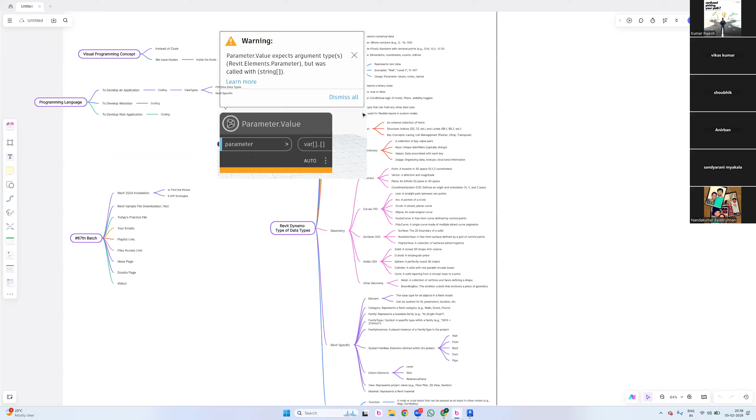Come on. So basically, you've seen the data type sheet. So what to do with the sheet? I didn't understand what to do with these sheets. And particularly when I'm searching nodes in Dynamo, there is one thing I observed: there is a node like Select Model Element. If I miss the dot, it gives me other nodes. So what's the importance of nodes, and how to identify when the dot is needed and when it is not needed? Please explain these two things.

We just finished only one day of training, Shoubhik. So you're asking very advanced stuff. First, one very strict, important note for everyone here. Don't panic. I won't miss even a single topic, because most of you are enrolled for the combo here. For now, about 60% are on the combo. The other 40% can convert by next week. After that, you don't have a chance to convert.

Okay, so most of you, I want to see in level 2 API. In API, we are not going to discuss anything about Dynamo. So to make you ready, I don't want to leave even a single topic out. Is it clear? Every single pinpoint will be explained. So don't panic. My explanations are very, very clear, like opening a banana and putting it in your mouth. Understand? I'm going to cover everything.

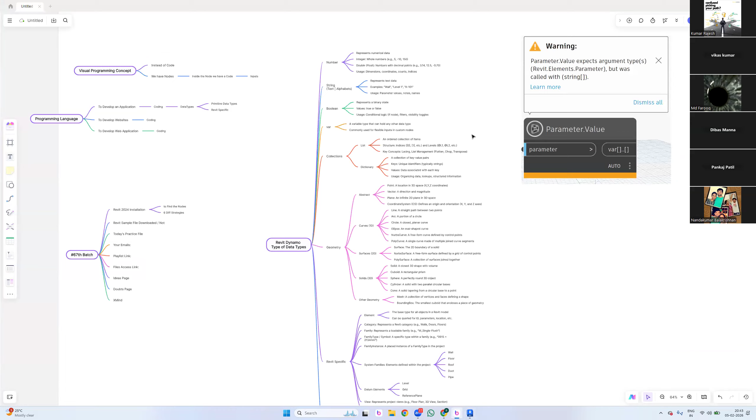Sir, actually, we covered the three data types yesterday, but I want to know, you explained two types of data types, like primitive and application specific. So do those data types come under primitive or Revit specific?

See, it's very simple, bro. Number is universal. In an application, for example in website development coding, do they use Revit terminologies? Do they use Revit terminologies in any website? No. Correct? No, sir. So if it is not a number, if it is not an integer, if it is not a string, if it is not a double, if it is not a Boolean, consider it a Revit specific data type. Very simple. Okay, clear?

So no more questions. Let's step into the topic. Okay, clear? So after today, first week, I don't want to bother you. Enjoy this weekend. Next weekend, we'll see. Okay, clear? So shall I start?

Yes. Okay, good. So we have seen yesterday what the primitive data types are. One is integer, one is double, and one is string. And Boolean we haven't covered. So yesterday I showed you how to extract that info. Now today we are going to set a value to those parameters.

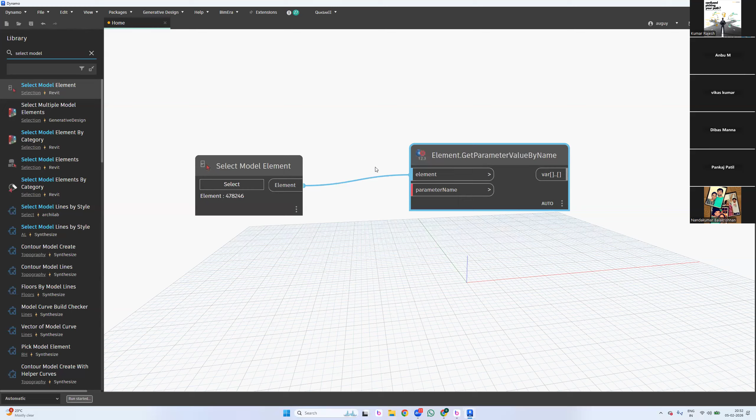Okay, fine. So it is expecting element, I connected an element, and this is expecting parameter name. So if any node is expecting a parameter name, parameter names are always in a string format, correct? So blindly you can place the string without a second thought. If any node is expecting a parameter name, consider it a string. Guys, clear? Clear, sir. Yes, sir. Even though for some set of nodes it is written as parameter name, when I hover the cursor on it, it will not show string there. But still you can consider, if it is showing parameter name, then it's a string.

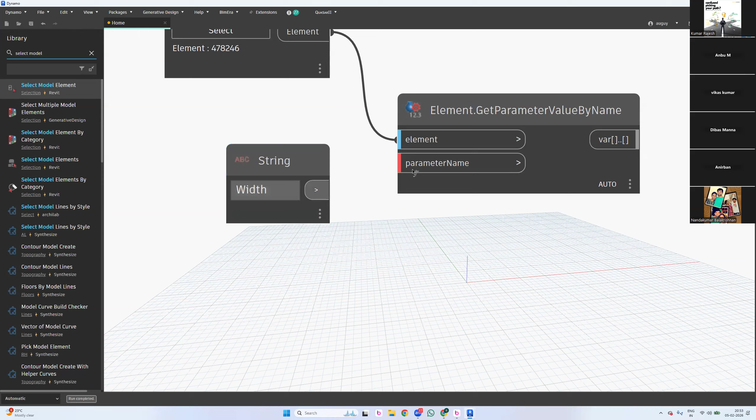Okay, fine. Now I'll ask for width or something, and it's set to 750. Now I want to change this width from 750 to some 900 or 1500, something like that. Now I'm playing with an element, okay. So there I use SetParameterByName. It is again expecting the same element. It is expecting parameter name, and it is expecting the value. So here I have three different inputs.

Okay, now, if I want to use it, I can take multiple connections from one output. This is an output port, correct? And this is an input port. But you cannot connect multiple connections to an input. For example, if I connect this to this, what will happen? The first one will be disconnected. So input accepts only one connection, but from output you can take many. You can take this to this, this to this. You can take multiple connections. There is no limit. Are you clear?

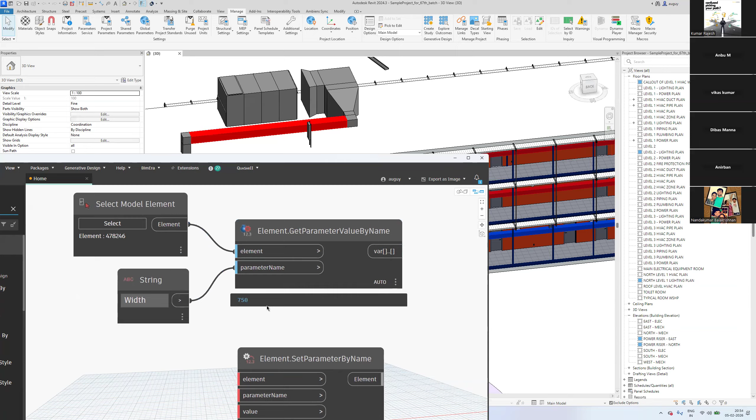So, are you clear with this? Yes, sir. Sir, here it uses this node, Element.SetParameterByName. As per your previous class, I can understand that I have the element and I have the name, right? I have to set a parameter value on that element.

Okay. See, here we are actually getting the value, but here I'm trying to set the value. Since it's already 750 there, I just want to change it to 1200 or something. Now, when I connect this to the same element, to the same width parameter, I want to set a value. And what is this data type? Integer.

The value is different, the data type is different. It looks like an integer, but actually it's a double. Correct? It looks fine, even though it appears to be an integer, it is a double. We can use double because generally we maintain some decimal values too. So I use a number node.

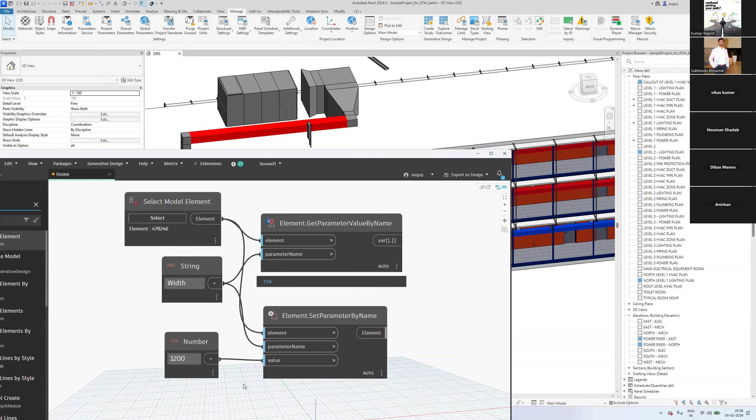If I set it to 1200 and connect this to this, see, the width has changed. Did you notice the width has changed? But sir, why is it still showing 750 there? No, it needs a refresh. Even though you keep playing, this will not refresh.

There is a bug in it. I mean, it's not actually a bug. We don't have a refresh button in Dynamo. Yesterday I told you, so we don't have any refresh button. To get this value refreshed, you have to copy and paste the node again. Now it shows 1500.

Hello. Hi, Rajesh. Hello, come on. Yeah, this is Sukhendu. Actually, I want to ask one thing.

If the duct size is 600 by 600, and if we change the width here, will it automatically duplicate, or will it just change? Let's say we have so many of the same type of duct. Changing the same element, it is not duplicating - you are changing the element directly. The same element is not duplicated. But if we have the same size duct in multiple places, how will it duplicate?

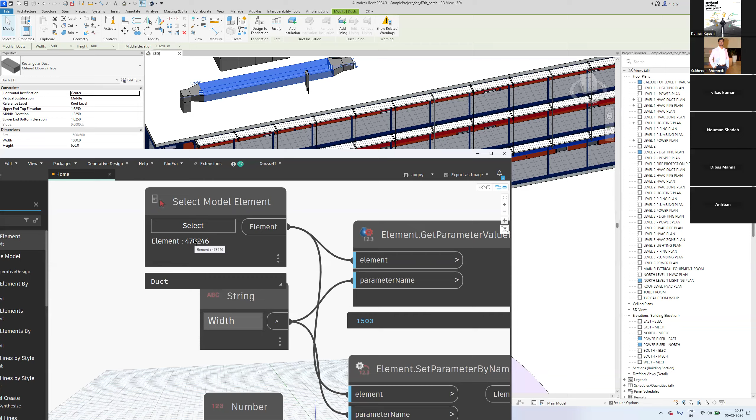No, see, very simple - you are playing with only a single element. Only that element will be changed. Are you clear? That particular element, element 478246 - if you have that given, it will duplicate maybe, right? No, it's the same element. You're changing the width value of that particular element.

Width is actually an instance parameter, so instance parameters obviously affect only that particular element. If it is a type parameter, it will change everywhere. Correct? Yes, if it's a type parameter. Correct? Understand.

Now, element.set parameter by name - I have changed this, I'll just set it back to 750 again. So is it clear? Are you clear? Yes, now clear.

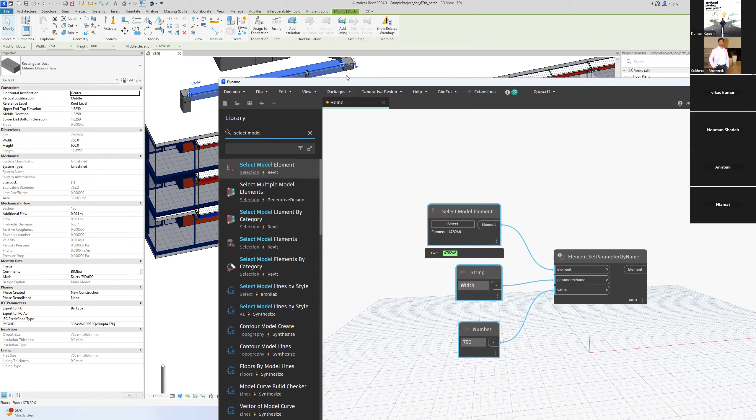So let's play with some other data type again - upper end top. Let me delete this for the time being. Let's see, here you have to understand you will face some struggles while we play with this.

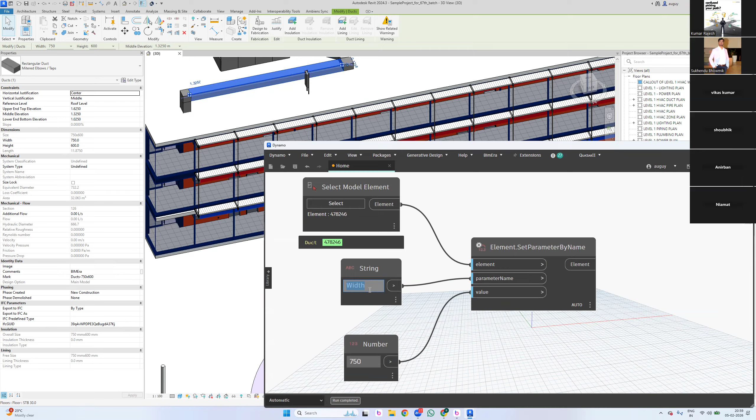Can we change the value if it is something like a report parameter, like there's a length which is 11.8750 which we cannot change now? I'll explain that tomorrow - why, and whether it is possible or not, and in case it is possible, how.

So it's moving. Okay. So now I want to change the height of this. Same thing again - disconnect this.

Capital H, and height is 600. I'll just make it 900. So it's changing. Let's set it back to 600 again.

Hi, Rajesh. Hold on. Sorry.

Hi, Rajesh, hold on. If the values are type parameter, is this applicable, right? Robert, your voice got stuck, Robert. I didn't listen to that clearly.

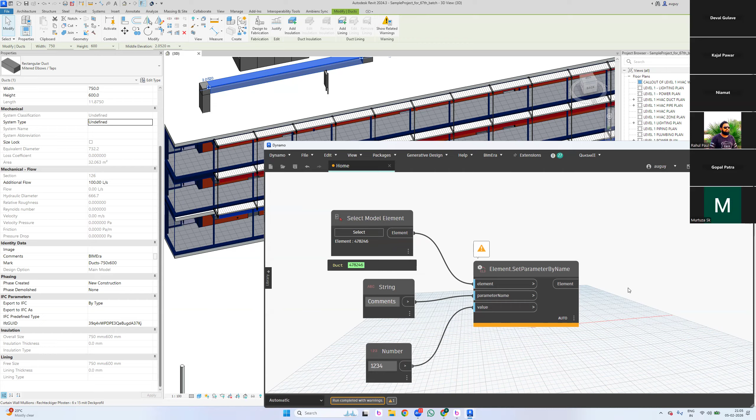So if you just want to read the warning, hover the cursor on it, and it's clearly saying that element.set parameter by name. I mean, if you want me to take a screenshot, I'll explain you. It should be by text. I'll explain you how. You have to use text string.

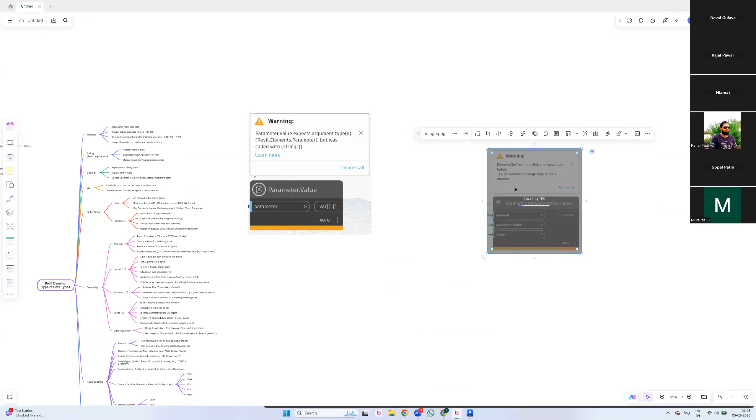See, this is the first warning actually, correct? So this is the second warning we have. Oh, it is loading, okay fine. What it is saying, element.set parameter by name. See why I'm stretching this, there is a reason behind it.

Yesterday also I showed you like parameter value, and I have marked these two things, I rounded those two things. The reason, sometimes the node name is something, but here it shows something else. Okay, so for your sake I'm explaining. Try to understand, whenever you see the warning, just cross check whether these two are exactly the same or not. Okay, you will come to know later.

So, element.set parameter by name, operation failed. Why? Did the parameter die? No. The reason: the parameter storage type is not a number. So it's clearly saying that you have connected a number, but the parameter storage type, the data type, is not a number.

Guys, are you clear? That particular parameter's storage type, in the sense, data type - so you are playing with the wrong data type. 80% of warnings are these two only. Seriously, let's see, in the entire training, do we see any other set of warnings? Nowhere. Data type warnings are the only frequent warnings till the end of this training.

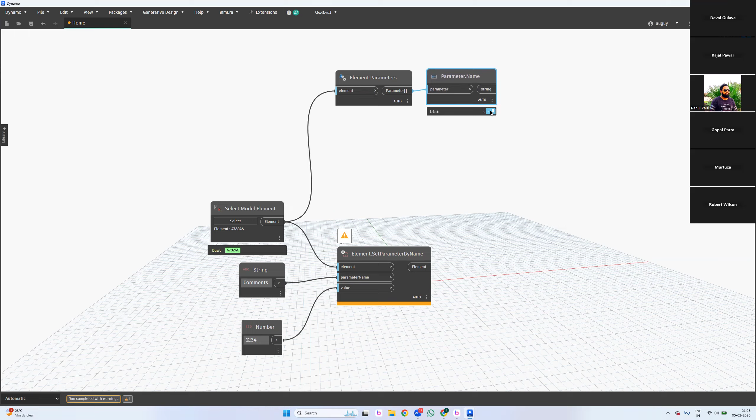See, if dot name is not working without dot. These are actually strategies I'll explain in coming sessions. So parameter dot name, now parameter dot space value.

Same again. Parameter storage type.

I don't need this anymore now. I just have to cross check. I'm trying to play with a parameter called comments. So where is comments? Fourth index value. This one we generally call the index number.

This part is an index number. 0 is an index number, 1 is an index number, 2 is an index number, 3 is an index number.

So actually I have 71 items, but in the end I see only 70. There is no 71, why? Because it starts with 0. Count the 0. All programming languages start with 0 index. Remember this, clear? It's an interview question generally. 0, 1, 2, 3 - for us it's an interview question, I mean when I was learning.

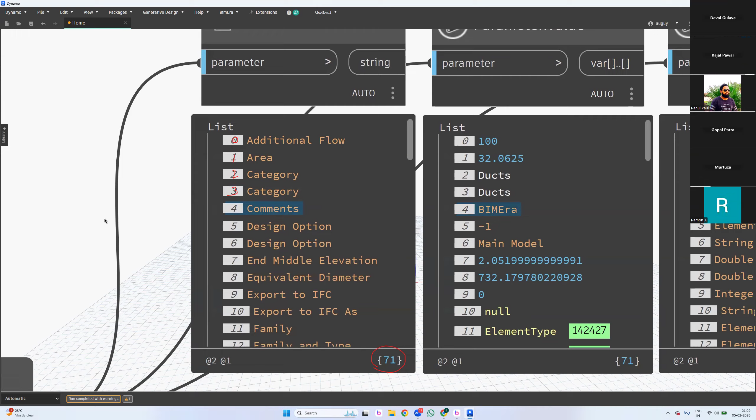So category, now I want to play with the fourth index. If you've seen the fourth index value comments, the entire flow where you use it will not break anywhere. So if the fourth index in a parameter name is comments, that exactly shows the same value. This value belongs to comments only. So this value, see this is string - data type is clearly saying I'm a string.

Are you clear guys? So if you want to set something, you have to play with a string, not with a number. Now I decided, oh this is not a number, that is a string. Are you clear? So if I enter the same 1, 2, 3, 4 and set it, now it will set that 1, 2, 3, 4 to it.

Can we change the justification and reference level, sir?

I'll show you, that is an element ID, I'll come to that in some time. First let's play with the numbers, then we'll come to the strings.

Actually, I have a live scenario in mind - if I want to put a value on comments on each and every equipment which is placed on level 2, then how can I do it?

We have a concept called filtering, bro. So we have a concept called grouping, sorting, filtering. There we are going to apply all these strategies - filtering by level, filtering by room, filtering by type, all these things based on the class, system, type. We'll discuss that.

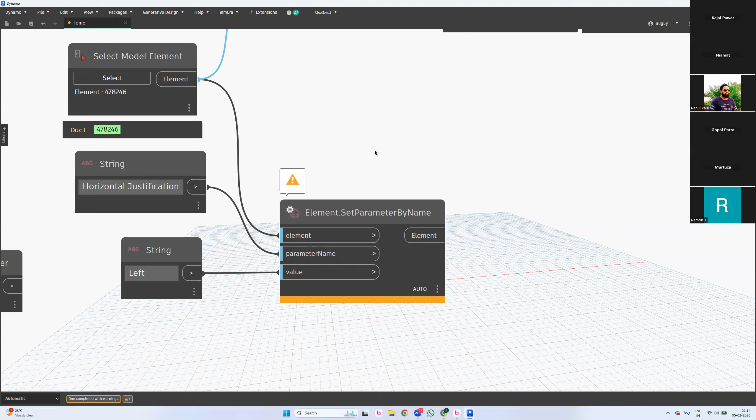Why isn't it working? It is expecting something. Let's see what it is expecting actually. When I hold the cursor on this, no, it's not giving any hint. It's saying that I'm not a string. The parameter you're trying to play with, the storage type of that particular parameter is not a string.

Are you clear? Guys, you have to be more friendly with the warnings. If you hate warnings, you will never become a developer. I assure, I sign on it. If you start, you have to fall in love with the warnings. So take a printout and look into it every day. Seriously. I don't know how many of you put your wife's passport size photo in your wallet, but this kind of warning should be printed and on your desk for sure. Everyone, I'll send you all this. So read it every day, recall it.

Okay, fine. So let me see what it is exactly. Horizontal justification. This is actually in alphabetical order. A, B is not there. C, D, E, F, G is not there. H, horizontal justification. So 18th index parameter. So 18th is 0. The value there shows center, but here it shows 0. Why? Let me read the data type. So 18th index is integer. How come?

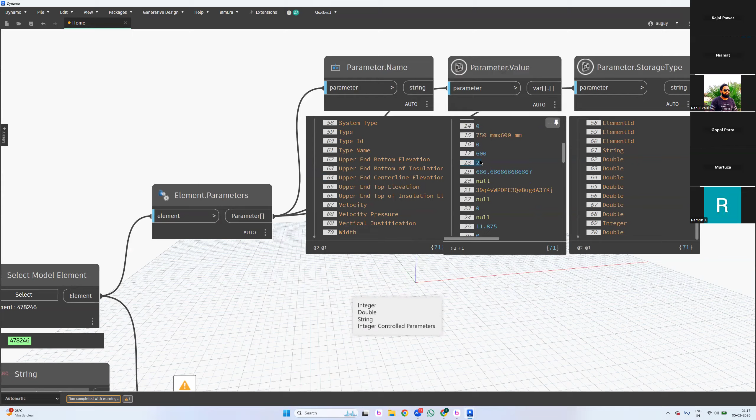Do you see that? Okay, let me try. I'll change this left to right again. I've changed here. Let me go and check. It's refreshing. The 18th index value is 2. Guys, got it? So let me take a screenshot again and I'll explain that again and copy paste. It's taking too long to copy. Okay, so third one.

So here, like a TV, right? With a remote we just select channels: 1, 2, 3. Yes, exactly. These are index values generally. So the first one could be 0, the center one could be 1, and this is going to be 2. The values are stored and they play with index values. Are you clear? But in that case, left should be 0, center should be 1, right should be 2. Am I right?

But when I'm playing with center, it is 0. When I change to left, it's shown as 1. When I change to right, it's shown as 2. What is that sequence? Come on, you can answer. Alphabetical order. C comes first, so 0 represents center. Next, L comes, so 1. And right comes next, so 2. Are you clear? Alphabetical order. So don't expect the same result every time.

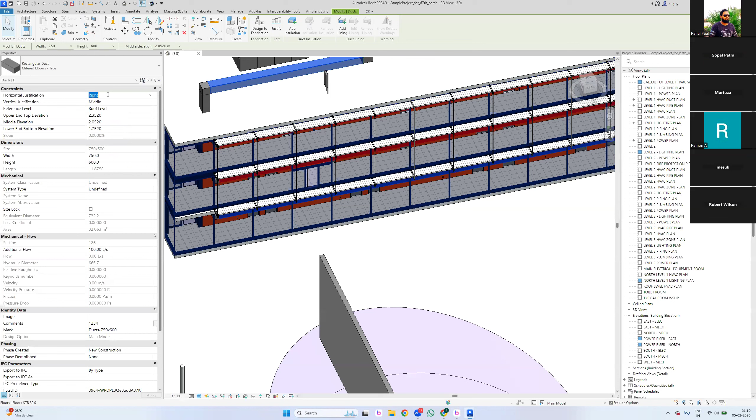But I want you to understand, when you hover the cursor on any parameter, if it is not showing as a text, consider it an integer controlled parameter. So you can't set a text to it. If I change it to something, it won't work. Then how do I control it? I'll show you here. It's very simple. You just have to change the numbers. So instead of left, I'll change this number to 0.

I hope you guys are clear what I'm doing. See, now it's set to center. What if I play with 1? It's left. What if I play with 2? It's right. Clear, everyone? What if I set 3? Think twice before you answer. Warning, null reference.

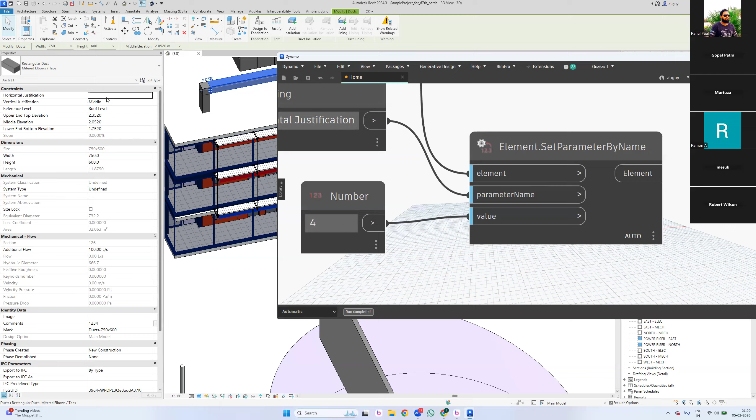The bottom level. It will show a warning, maybe. What happened? No warning. It has set empty; there is nothing over there. What if I set it to 4? Okay, nothing is there. So sometimes it will show you the warning, sometimes it will set to empty completely. I hope you're clear with this. Clear, everyone? So this is an integer controlled parameter.

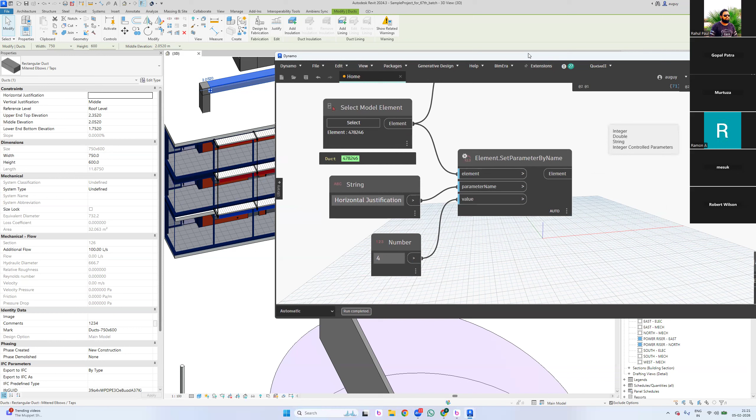Now, let me ask a similar question again. What is the storage type of vertical justification? Same integer control, same numbers. See, you changed your answer immediately. You are not saying it is a string, correct? So don't take blind decisions. When I hold the cursor, now it shows a drop-down list. What is that now? It's an integer controlled parameter. Reference level?

Justification, spelling correct, no? Okay, let me change it to 0. It is set to the middle. 1 is bottom. 2 is top. 3, nothing. Okay, fine. Now reference level. Let's say, what if I set it to 0? For vertical justification there is no center option; it will be top, middle, and bottom. For horizontal, you will see center. Middle means the center, I think. So reference level, and it is saying something else: the parameter storage type is not a number.

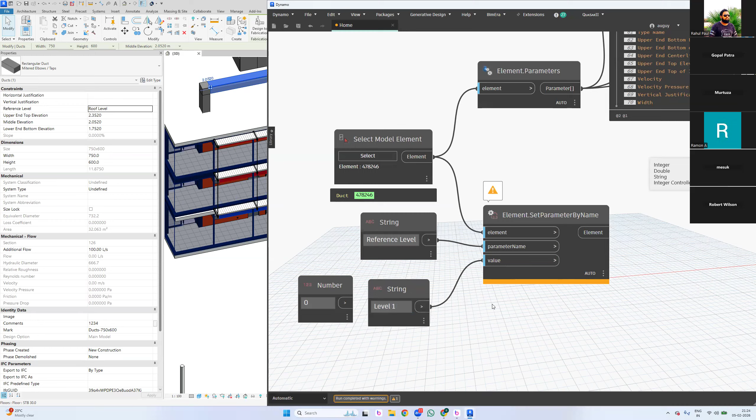Now again, the same. This block needs exactly the data types it needs. It will not tolerate it; it will not allow you to execute even. The parameter storage type is not a string. So I connected a number, it is not accepting. I connected a string, that is also not accepting. Then how? Give me an option. Element ID.

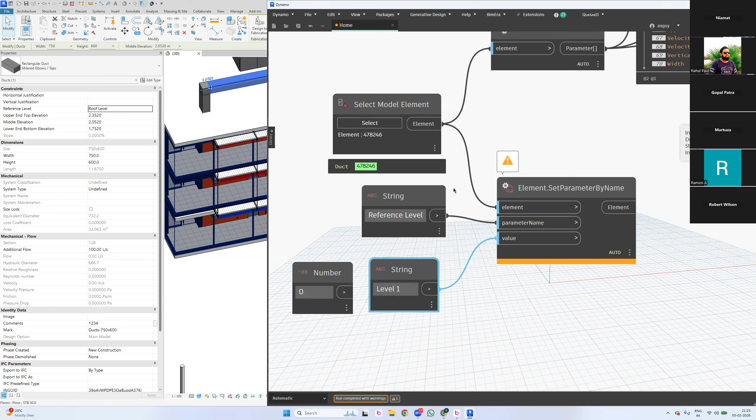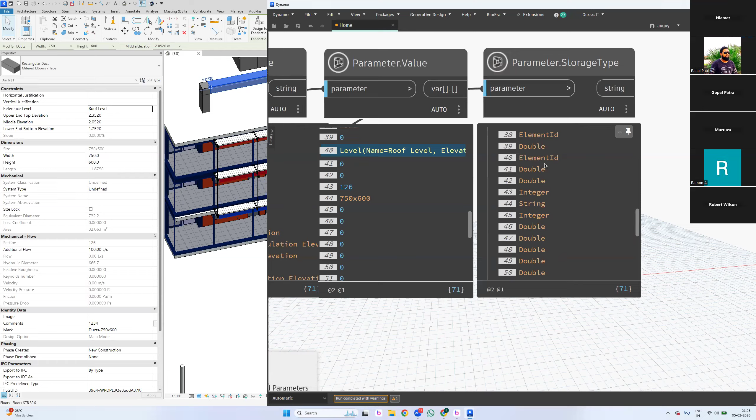So what is this exact storage type? Let me go and read here. We have this option, correct? Don't forget this. So reference level, index 40. The 40 index value is yellow color text; someone noticed the color yesterday. So 40 here, it is element ID. It is not a number, not a string, not an integer controlled parameter. Now I'm continuing the statement: if any parameter shows a drop-down list, either it is an integer controlled parameter or else an element ID.

Are you clear now? Element ID. Are you clear? So I'm not going to extend this statement anymore. I have only two options. When I hover the cursor on this, it is showing length, and it's a built-in parameter. So it is a double. Length will obviously be a number itself, so length can have decimal values. So it's a double. Are you clear, everyone? Clear. Good.

What if I play with some wall? I'll just play with this element. Disconnect. Play with a wall or column or something. What is the storage type of the location line parameter? Integer controlled? Or else element ID? No, that's not an element. Integer controlled, maybe, they have given the numbers. I'll give you a detailed explanation of why it is actually integer controlled and why it is element ID.

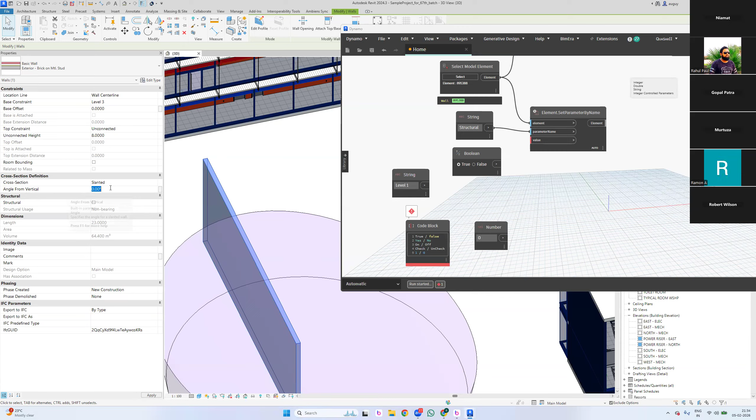And if you have noticed cross section, if I set it, why it is controlling by itself? So vertical, if I change to slanted, now there is a hidden parameter in it. Do you see that? So what if I'm trying to play with this particular angle from vertical? Angle from vertical, I know that is actually a number. Let me set it to vertical, and I know it is expecting a number, and I want this to be set to a value 45.

It's saying that no parameter found by that name. It is not even saying I'm not a number. It's saying that I don't have that parameter in your database. So there is a parameter hidden. Since it was not in the database, not on the properties palette, it's clearly saying I can't see it anywhere. But whenever you change this cross-section parameter from vertical to slanted, now check, it has assigned the 45 degrees. So there are possibilities that you can control either hidden parameters or linked parameters. We'll see in the coming sessions, don't worry.

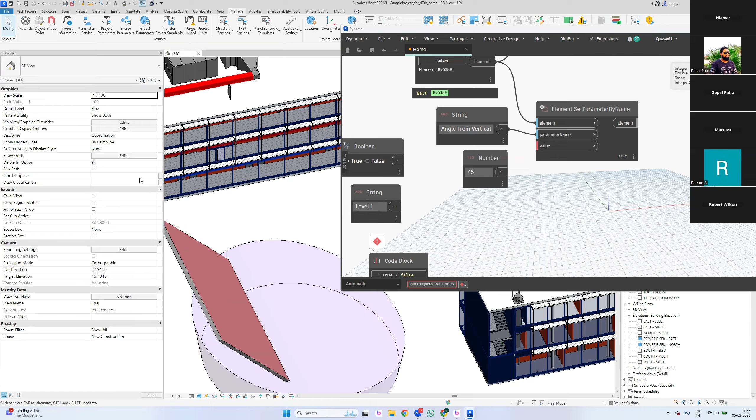Sir, do the drop down data types always come in alphabetical sequence? Is it a thumb rule? No, can't say. It depends upon the developer's mindset. Some of the inputs are dictionaries. In coding, we have concepts called list and dictionary. If the user uses a list, it is in an order. If the user uses a dictionary, we can't control it. It depends from project to project, application to application. It's a technical question. Is there any way to understand how it's represented? No, generally you can't. We'll see that later.

Why is it showing run completed with errors in the bottom? Because when I just click on it, because of this. If I delete this, see, run completed. Yeah, got it. Okay, clear?

So you understand what the drop down list is. Now, guys, up to now is the complete concept clear? I'm not going to discuss anything more about integer, double, string, boolean and integer controlled parameters. We are entering into element ID parameters. The concepts we covered so far, anyone can understand. This is more important because for most of the parameters, you have to understand what Revit specific data types are. Guys, clear? Raj, I have, like, in Dynamo.

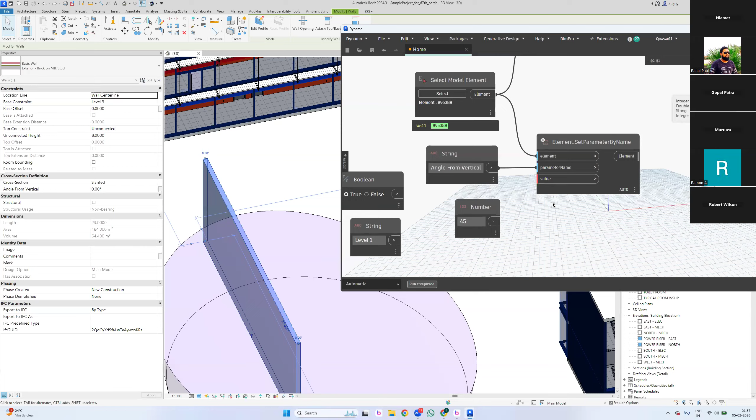In Dynamo, we are writing the parameter name in the string every time. Do we need to do that every time, or do we have any drop-down list which will show all the parameters available for the wall? Such a lazy guy. You can't even type a parameter name there, bro. No, there is a way, but I'll explain.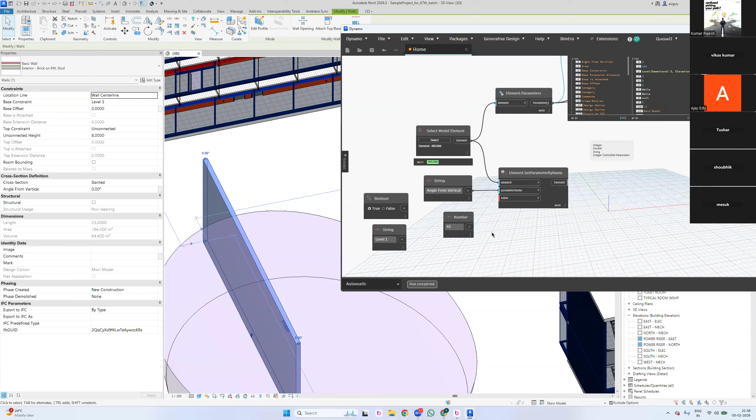First, let's go with the basic stuff. We can directly pull the parameter name from this, indexing. I'll explain it to you, but not now. So first, let's see what parameters we have, element IDs. Location line. It's a drop-down list. When I hold the cursor, it's saying that.

If you clearly notice, 1, 2, 3, 4, 5, 6. Do you see that on the image there are some numbers? I think you didn't notice it so far. Can you guess what that 1, 2, 3, 4, 5, 6 is? So it's like wall center line, layers. Correct. It's for compound walls. One is for wall center line. This is the line justification. Two is for core center.

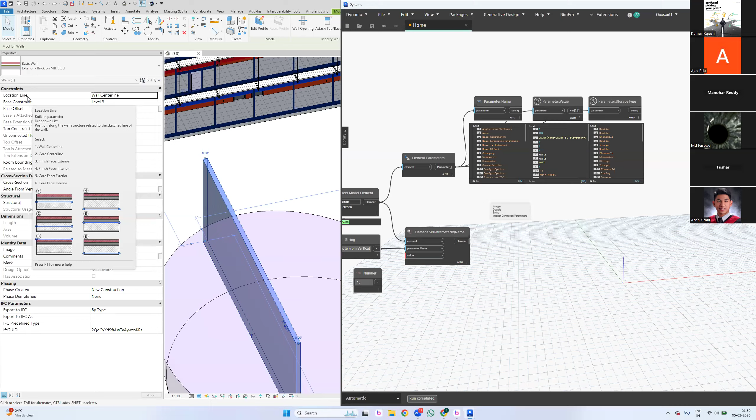Why is there no zero then? As per my previous statement, the indexing should start with 0, right? Revit data is a dictionary. So dictionaries will start directly with 1, 2, 3. I don't want to confuse you. We are going to see this in the technical sessions. Now, forget about all this. When you hold the cursor on this, it's showing a drop-down list. We have only two options, either integer controlled or element ID. So let's play with it directly. This is your practice today. I completely forgot to ask how many of you have done this.

Sir, see, it's wall center line. I have a question. You told us that when we hover the cursor on the location line, it shows us a drop-down list, and that it may be a number type or it will be selected as an element ID. But if that's not an element, how can I select it as an element ID? In the previous example, we can select the levels because the level is a complete Revit element, like a grid. But wall center line is not an element. It doesn't even exist in Revit. So it's always a number type. That's my guess.

Not exactly, but I'll give you the detailed explanation today itself. We are almost close to it. Now, what if I change this to 0? It's saying wall center line. What if I set it to 1? It's changing. So consider it an integer controlled parameter. Let's play with base constraint. When I hover the cursor on it, again, it is a drop-down list. When I connect this, it's saying the parameter storage type is not a number. So it's an element ID.

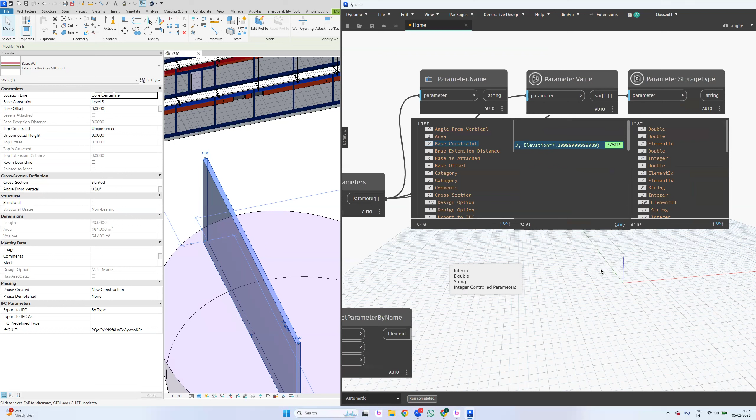When you write a name to this, I'm going to convert that into the level. The reason: the base constraint parameter, the second index, is an element ID. I can see there is an ID here, 378119. 378119 is not this element's ID. Why? Because this element ID is 895388. Then what is this 378119?

The element ID of the level. Element ID of that particular level. Okay, 378119. Manage, select by ID. 378119. When I just click on OK, I see that category itself, it is showing it's like a level.

Guys, are you clear? Yes, it shows it is a level here. The ID of it is a level. So if any ID which is actually coming here is showing something, if you really want to play with it, just read what is it, 378119.

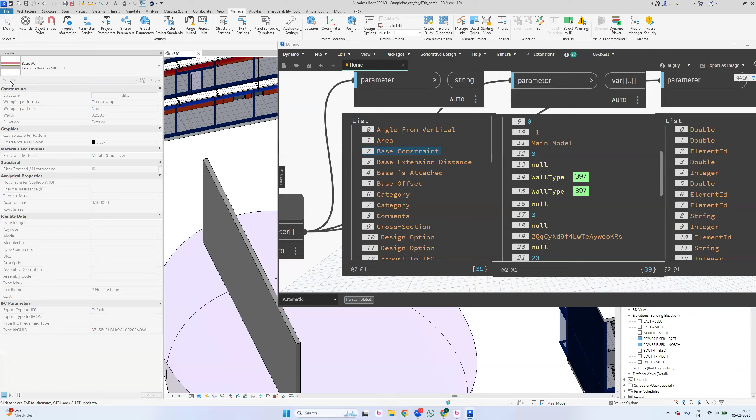It's very simple. For example, if I have any other element ID 397, type it again, manage, select by ID. It's a very simple formula, no need to panic. 397, simple, just click on it. See, it is not wall.

It is not wall. For your understanding, this is actually called a category, bro. This is category. And the first one is what? Family, correct, it's a family. And what is this? Family type. Correct, it's a family type. Generally, how many element IDs would be there for one element?

Obviously one. But have you ever faced this, like when you're trying to copy an element ID from an element in Navisworks, and when you copy and paste in Revit, sometimes it shows 'I can't find that element'? Most of us faced it. Do you know the reason why? You copied the exact element ID only, but still it shows something wrong. The reason: instead of copying that element ID, maybe you have copied the element type ID or else category ID.

Okay, if you don't believe, I'll just show you, because this element ID concept is more tricky. You have to understand the deep roots of it, otherwise you can't really understand. So I'm giving you sort of theoretical knowledge. Are you clear? Let's read it more clearly.

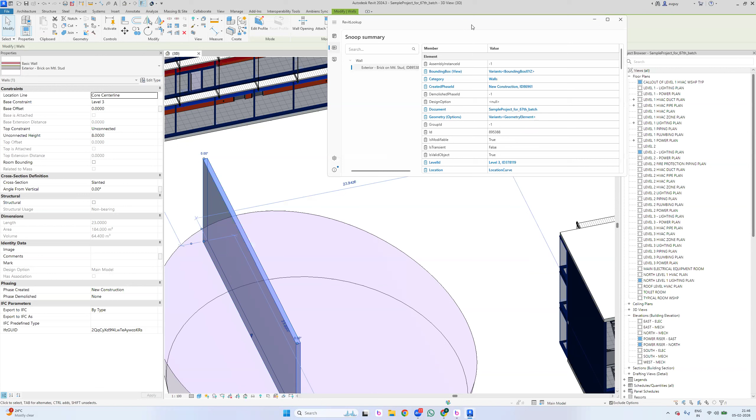So this is showing me a properties palette again. This is the actual properties palette we're supposed to play with, not this idiotic properties palette. If you compare this properties palette with that one, this is not even 2% of parameters. The rest of the 98% parameters are here - a more powerful properties palette, only for developers.

Are you clear? Based on this, for example, if someone comes and asks me, 'Rajesh, can I get all the ducts which are running from right to left?' I can get it. How? The reference I take from lookup. Okay, Rajesh, when I'm trying to play with the ducts, it's selecting all the ducts, but I just want to create floor openings where the ducts are vertical. Can I extract those? Yes.

Again, how? The Revit lookup. Because I don't see that information. Can I see that is that a vertical duct or is it a horizontal duct here? No. Can I see the element ID property here, element ID number? No. So the entire information, the entire data to play with an element is actually hidden in this lookup tool.

So let's play with this - if you're able to understand fetching the data from this Revit lookup tool, consider you are a pro. You can stamp yourself, 'I'm a pro guy'. Is it clear? Okay, let's step into this topic because we don't have time. I don't want you even confused, we'll discuss all this in another session.

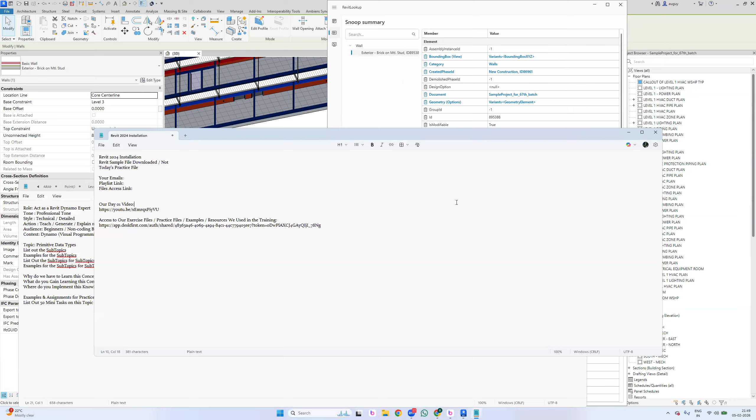Above, this is prompt actually - I'm going to share you the prompt later. So this is an element ID. Okay, fine, where is this element coming from? A type.

Get type ID. So when I just click on it, I am going to get a type ID. This is 397, copy value. Type ID, okay, where is this type coming from? 397.

Wait, where I am? This is an element 1, this is a type 1, 397. Where is this type coming from? It is coming from a family, correct? Do you know this hierarchy, or did you forget in the first year itself? Do you remember?

Okay, you have kept a blank face. Let me show you. Generally, Revit element hierarchy, bro, generally Revit element hierarchies are like this. First, category comes, correct? Category comes, so category has a different ID.

Inside the category, I have families, so these families have a different IDs. Inside the family, we have multiple types. This has a different ID, this has a different ID. Guys, are you clear? So again, in the types, we have multiple instances.

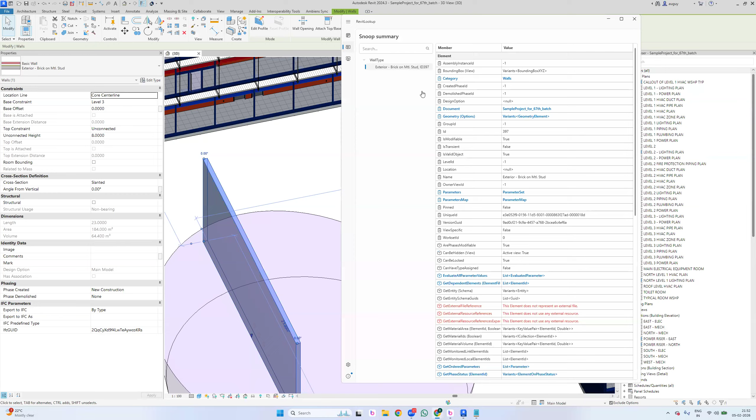For example, if I let me - what is that instance mean, like the parameter? Our element - this is an instance element, no? Instance. Revit instance, I mean element. We, parameter, generally called as a Revit instance or element or component.

Clear? Okay. Generally in our Revit training, they used to say it is an instance. Most of the Autodesk people call it an instance only, not an element. Okay, fine, so that is what. So when you are playing with it, it is showing like an element ID. Now in Dynamo, if it is showing like a 397, if I manage select by ID...

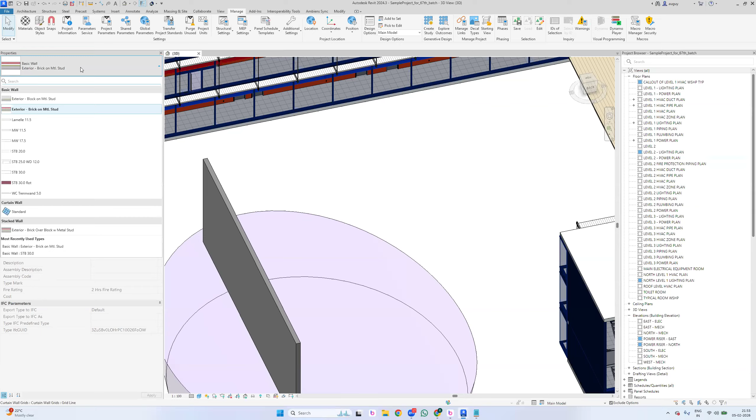397, just click OK. So even I'm not able to control the category. I see there it's showing like a wall types. Correct? So I'm not able to play with any of the parameter here. I can able to play with the types, so it is playing with a wall type.

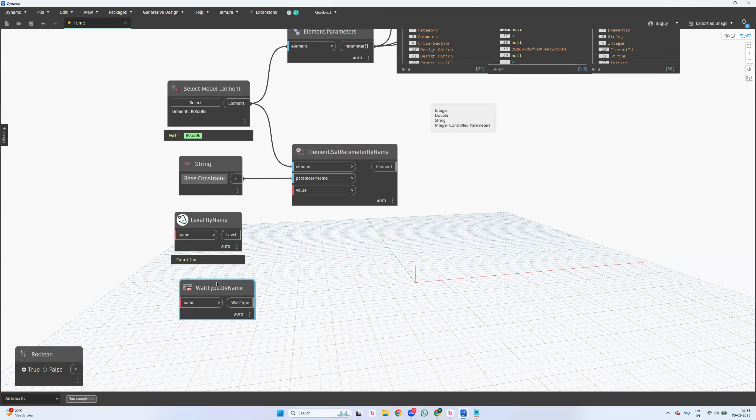In that case, I have to tell that I have a wall type - it's clearly saying that it's a wall type. Then wall type dot by name - by name, wall type dot by name. Guys, are you clear? So when you type a wall type name, then I'll convert that into the wall type.

So what if - what is it expecting when I hover the cursor on this? It's saying string. Okay, when I hover the cursor on this, even that is also expecting string because they are names - obviously names are in strings only. So I have a string, I'll say level 1.

When I connect this, I have a level with level 1. I have a level with level 1. Okay.

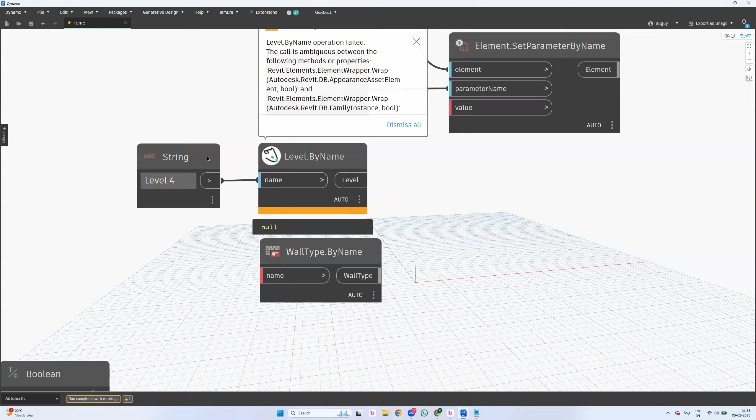No, why? Because we don't have any such levels. Level 4 - yeah, we don't have a level 4, we have a roof level instead. Correct? We don't have a level 5. See, it's clearly saying that - so level by name operation failed, the call is ambiguous. So what it exactly means is when you're trying to play with something, I couldn't find it anywhere. Some of the warnings can't convey what it is exactly expecting.

So it may confuse us. Okay, so this is a very rare warning. Now level 4, then what is this about? Roof level - roof level, it is working.

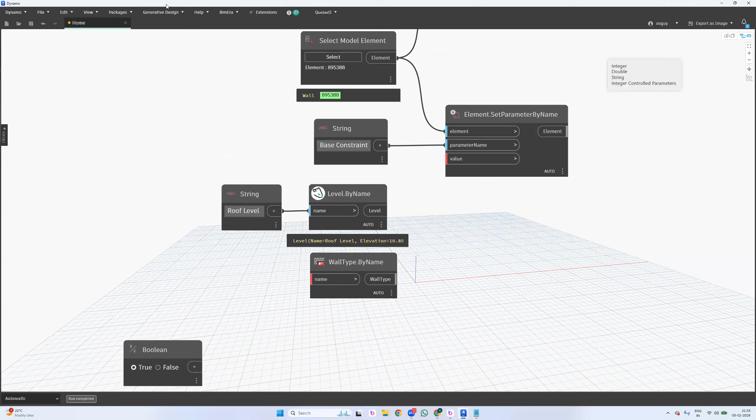Okay, fine, so when I connect the same, so base constraint - as of now it is level 3. I'll just change this to level 1 and connect this because base constraint is an element ID. You have to connect an element ID to this. Are you clear?

Are you clear now? No, sir. So much confusion actually, it takes time.

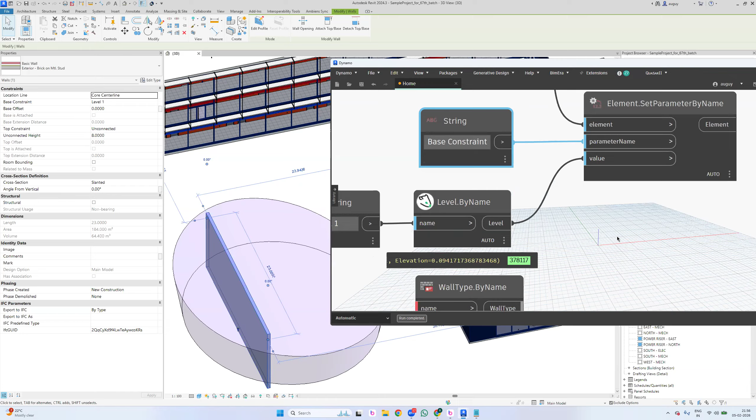See, it's very simple. What is this expecting? What is the base constraint expecting? Level, element ID. Level, element ID. Storage type is an element ID. What is that? Which element ID is it expecting of a level? Correct? So how do you get the level ID?

That's what we are getting the level IDs here. Okay, so this is somehow tricky. This is a traditional process. Rajesh, do you have any other process which is more simplified?

Yes. There is one more node, like some element dot ID. Can we use that? That actually gets an ID of an element. Here, I want a level ID by its name.

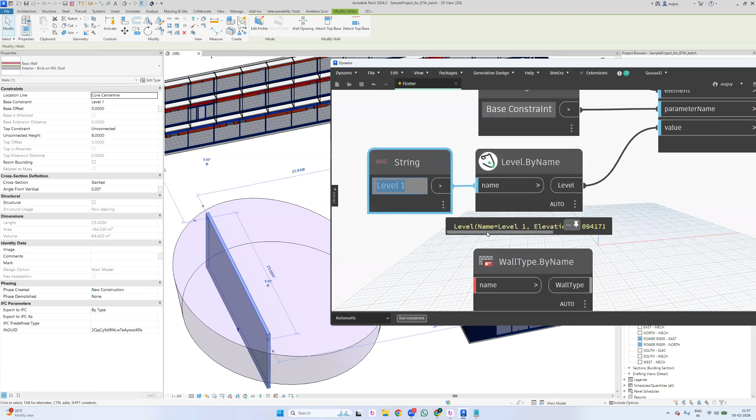Are you clear? Okay, so when I type by name, giving the name, it's going to get that ID, level and the ID of it. So we have to connect the ID only. So how do you say that in the end? Sir, is there must be necessary to add level by name node to the value?

Actually no, this is a traditional concept. At the time I was learning, we don't have the shortcut nodes. Then what is a shortcut node? I'm actually asking, can we connect that string to the value?

No. See, when I connect this to this, it's giving me a warning. The parameter storage type is not a string. So if that parameter is actually created from integer or double, can we put that? We tried that already, integer also. See, the parameter storage type is not a number. The parameter storage type is not a string. The parameter storage type is not a boolean.

See, clear? Yeah. So what was that then? It means it is expecting level only, and it clearly looks like a text, but it is an element ID. Okay, in that case, if we know that this is expecting element ID, when you're connecting something to a value, it should definitely have that element ID in the end, and then only you can connect.

Or else, Rajesh, this is somehow tricky. Is there any other simple option? We have a dedicated node for it. So you no need to type anything. Levels: pick level 1 and it will change. Pick level 2 and it will change. Pick level 3, it will change.

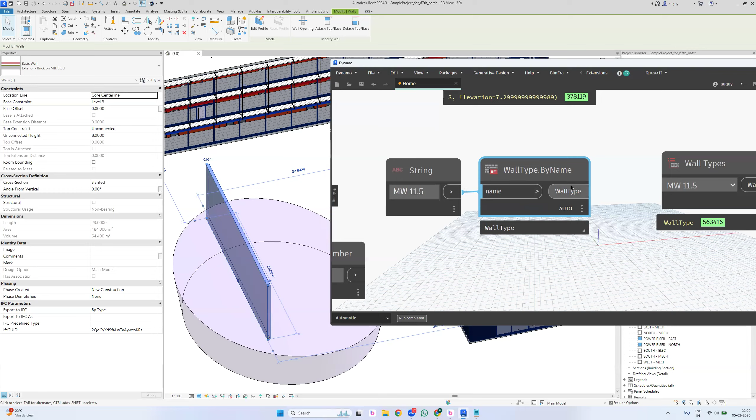MW space 11.5. When I connect this to this, this node will convert the text into an element. By name, if you connect a name, I'm going to give you the wall type as an output. Just connect me the name, I'll give you the wall type. Just connect me, where is that level by name? Okay, I'll bring it. So, wall type dot by name.

Are you clear, guys? Is this clear? So this is the process. So most of the nodes, if they are expecting an element ID, we have dropdown nodes. Either you can follow this or else you can follow this.

How come these nodes are like taking automatically from Revit? Those are not, we are not selecting anything from Revit, like wall type and level. They have the default functions in it. So inside the block, something has been written. Okay, this is like a block. Something has been written in it.

The functions are written, like it's going to print out what are the types we have, what are the settings we have, what are the systems we have, everything. Okay, clear? So drop down nodes.

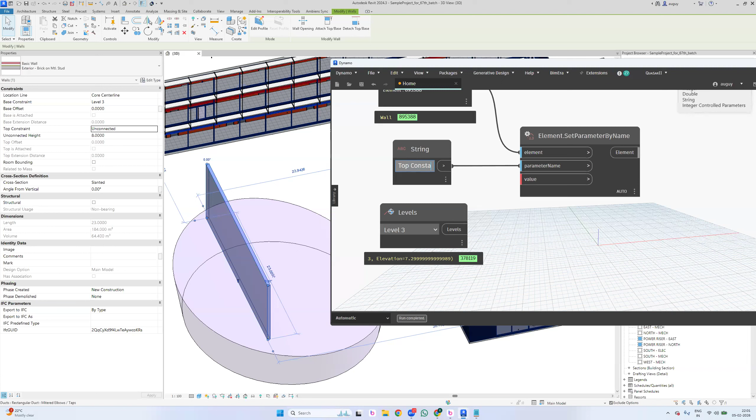So what if, what about top constraint? Come on. What about top constraint? That also we will have to take levels from level as the input. Top constraint? That's an integer control parameter, I guess. Top constraint, drop down list again. Okay, and unconnected, if I notice, it is actually saying up to level 1, up to level 2, up to level 3, up to roof level.

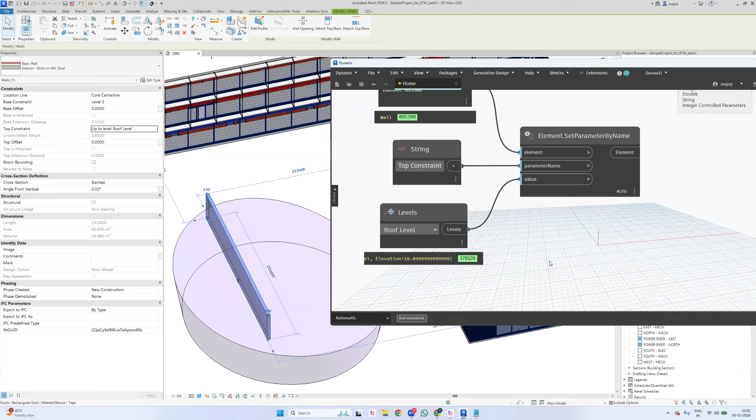Okay, so what if I say up to roof level, connect this to this? It worked. Guys, clear? Yes. Clear, no? Yes, yes. Okay. Good. So play with the element ID parameters. Play with element ID parameters. You will have a lot of confusion while you're playing with.

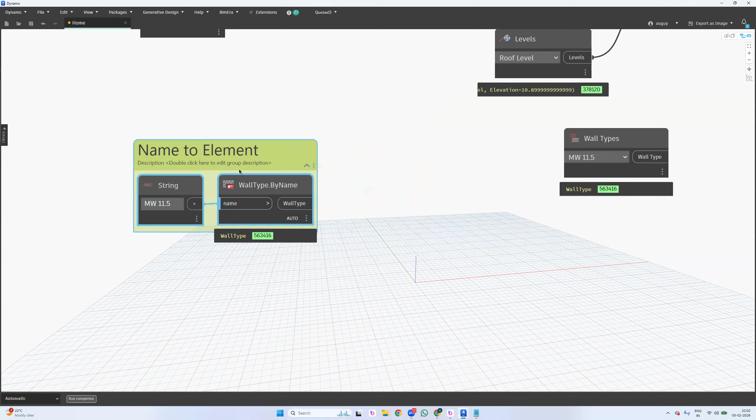Seriously, element ID parameters are not as simple as the primitive data types. Element IDs are something. And today I'm going to give you 3 different explanations to play with. One is this option, by entering the name of it, name to an element. This is the traditional concept we used to use. Everyone should follow this. This is the first concept.

And there is a second concept. This is short. Actually, this is the third one. We have another actually. Let's make it a third option, third priority. In interviews, they will see how complicated even you are using. Okay, so this is a third option. The third one is drop down nodes. Since we are becoming more lazy, even the developers know these guys won't follow the exact strategies.

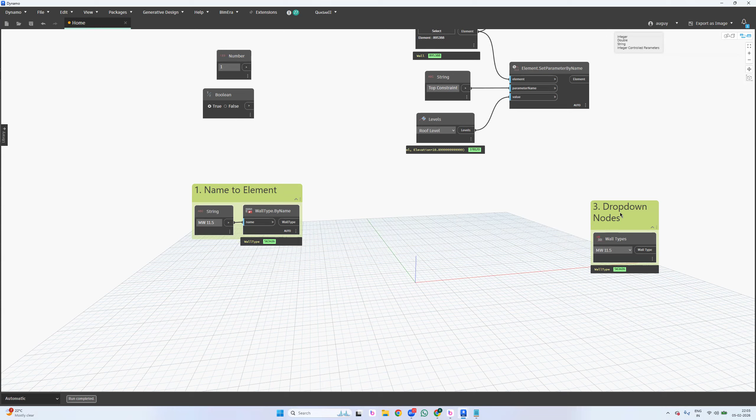So let's create some. And what is the second one, which is more important, very very important, the nodes which we are using now. Of course it may confuse you, but you can't skip some set of concepts at all. This is one of the concepts, playing with element ID parameters. Okay, so there is no other way.

Rajesh, if you want me to explain, I'll keep on explaining, but don't fool yourself. Come on. Rajesh, can I ask you something? See, if we put level by name, we got the ID, right? So if we put wall by name, it gives the ID also. See, very simple, bro. Let me show you how many nodes are like this. Any item you can put. Let me show you. So when I type by name, see how many nodes are there.

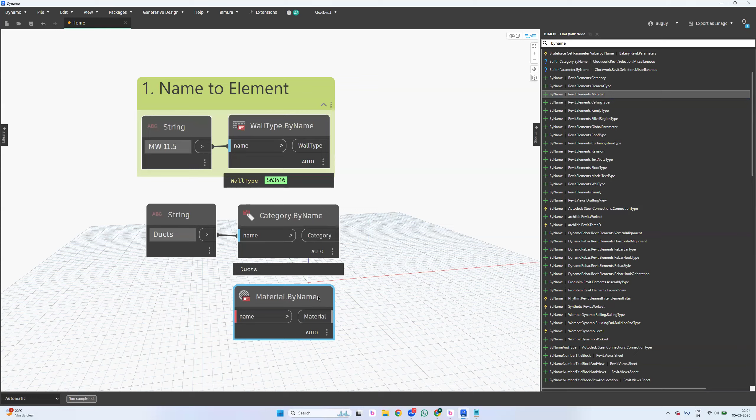So Category.ByName. So when I type a name, let's say a string, when I type ducts here, it's going to give you the duct category. Do you see that? Correct? Okay. So what if I type Material.ByName? If I type a material name as a string, it's going to create a material here. Is it clear? What if I type a family type name? It's going to give me the family type.

Guys, are you clear here? So what if I type roof type? It's going to give me roof type. Sir, sorry, I'm interrupting. What if I want to get the element ID of that duct category? Element ID of? It is actually duct category. You can't see, but it is giving the category only. If you want to see the ID, you have to tell that clearly. I have a category. Can you please get me the ID?

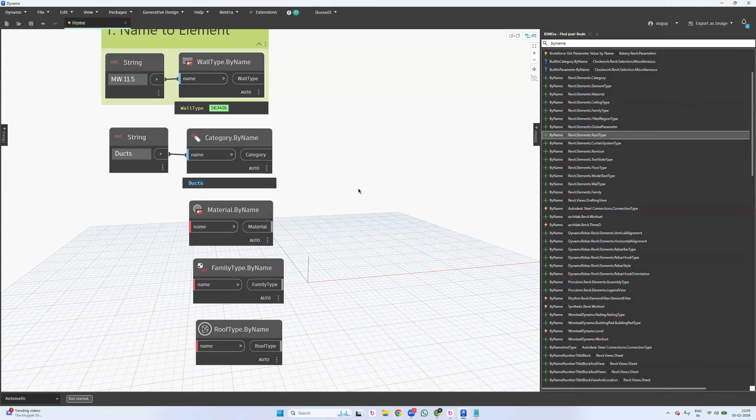Very simple. I have a category, Category.Id. Okay. I have the category, I need the ID. Yes. That's an ID. Is it clear? So if I have a material, Material.Id, same thing. Now category, wall types. I have shown you wall types here. You Control C, Control V.

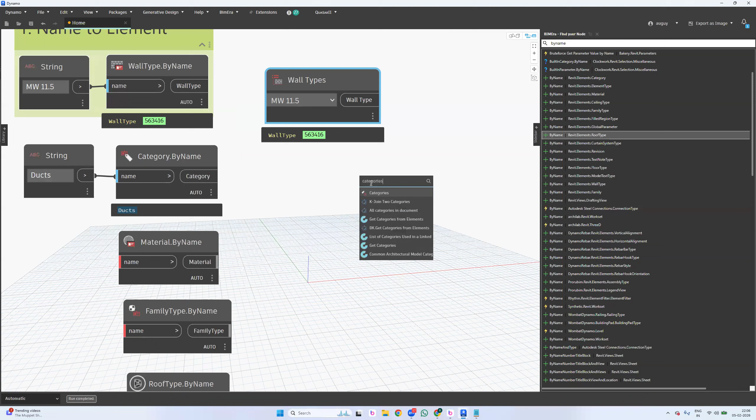Okay. So if I want to see the drop down list for category, Categories. If I want to see the material by name drop down node, Select Material. See? Okay. And if I want to see the family types, Family Types, bro. See, drop down. What if I want to see the roof types?

Roof types. Are you clear? Actually, this is a traditional concept which I used at the time I was learning. But now you guys have drop-down nodes. But try to remember this concept as well. Are you clear? Guys, are you clear? Of course, I know most of you prefer this.

Most of you prefer this because if any parameter is expecting a category, you'll directly go with the drop-down, because we can't exactly remember how many categories we have or how to write that particular category name. Instead of Ducts, if you type Duct here, it says that I don't have such a category. So you have to type the same name exactly. Otherwise it won't work. Fine.

So this is another process, the nodes and other stuff. Guys, don't panic. I don't want to end any concept in a hurry. Unless you understand, I may extend the session to tomorrow as well. But understand this element ID concept very clearly.

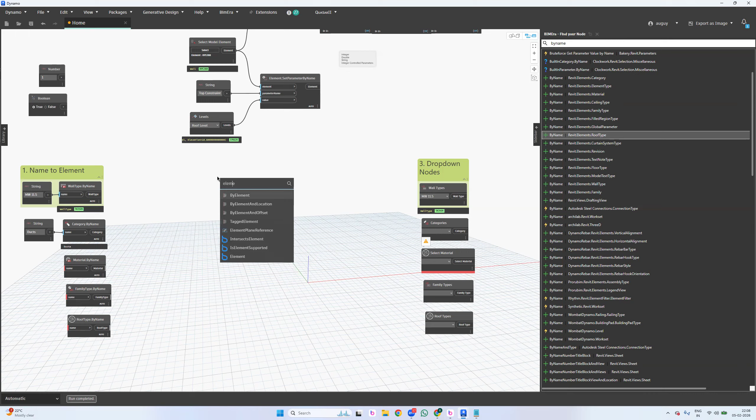So the first process is by name, and the second process is the drop-down. And what is the main process between 1 and 2? There is a node called Element Classes, and All Elements of Class. I really don't want to confuse you in the beginning stage itself. This is a very basic funda I'm teaching, and I can't take this concept again in the middle of other concepts. Mine is completely concept-based training.

Once we finish this element ID, I don't want this concept to be explained in any other sessions. Are you clear? You have video access. Please try to recall this element ID concept two to three times until you understand it clearly. Clear, guys? So what is this Element Classes?

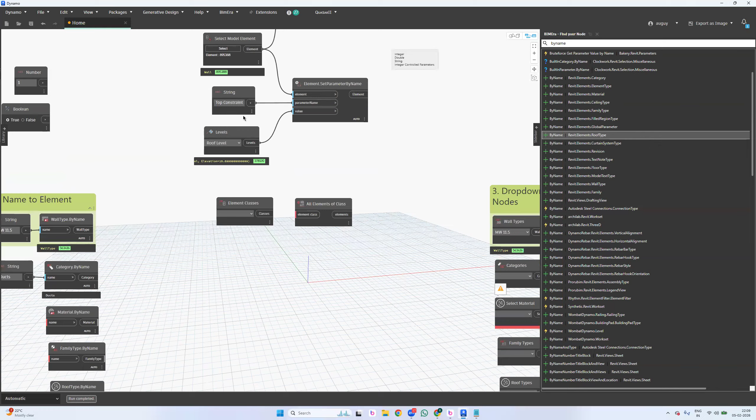For example, I know the top constraint is actually a level. So when I type level here, I can see that. When I connect Element Classes to All Elements of Class, it's saying that you have 4 levels in your Revit application. Which one do you want me to pick? In the end, I see the element IDs as well. Guys, are you clear? It is exactly here.

The thing is, you have to type that particular level name. Here, it is saying that you have 4 levels. Which one do you want me to pick? This picking concept is called indexing. So what is indexing? If I need the 0 index, open a code block. Just double-click with the left mouse button, and then type.

I have a list. So I'm typing: I have a list, Mr. Dynamo, can you please get me the index value 0? And these are not general brackets like round brackets. These are actually square brackets. Don't use any other brackets until I explain. Remember, initially we are going to play with square brackets. Later, round brackets, and later, curly brackets.

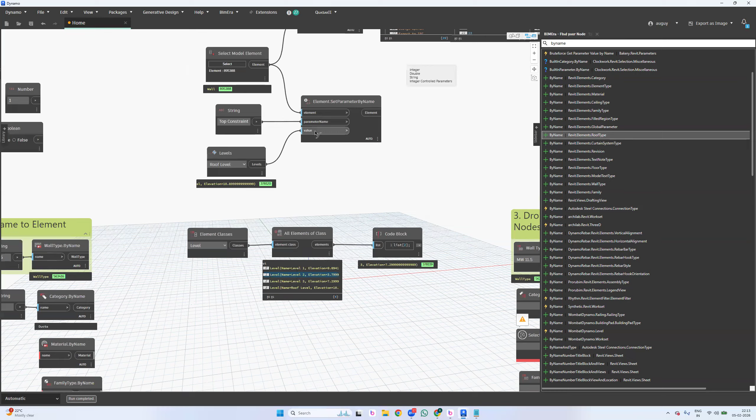So level 1. So in the end I have an element ID. What if roof level? No? So let me set it to 3. So it's giving a roof level. I connect this to this, so it goes up to roof level. Okay. So base constraint is actually level 1.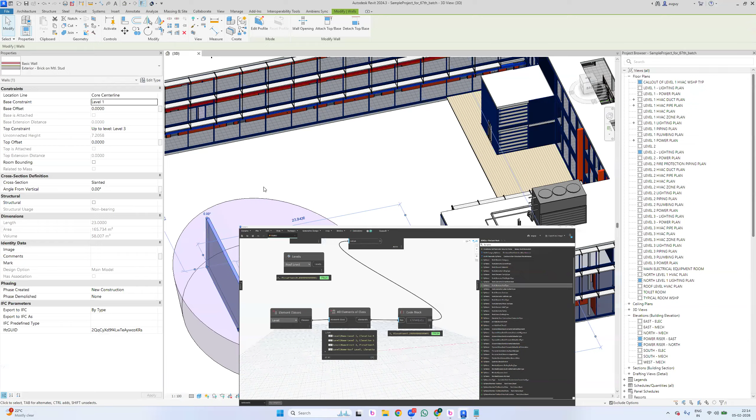Okay. Let me change this. If I change the number to 2, 2 in the sense second index number, so it's level 3. So if I go and check, the top constraint is set to level 3. Guys, are you clear? Clear.

Yes. Okay. Rajesh, in the early stage of learning, I don't recommend this for you for the time being. Okay. So this is an outdated concept. I don't want you to use an outdated concept. Okay. But that's how generally it works.

In case you can't find something, this is the second priority. This is the first priority. This is the second priority, and this is the third priority. Guys, are you clear? So you will get everything.

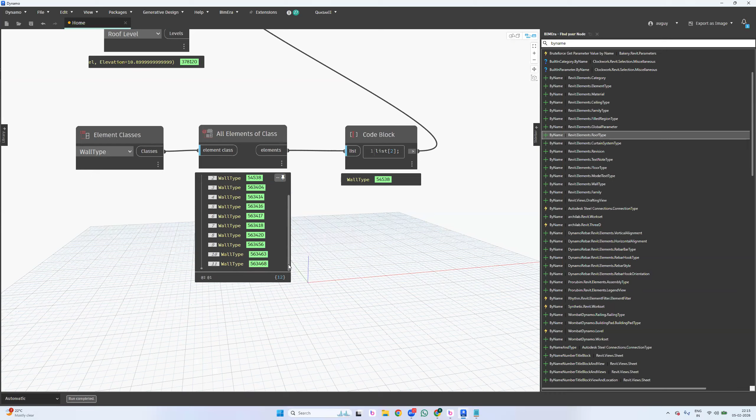If I want to get a wall type, I'll type wall type here. See, hold on, deselect that element. I have total 12 wall types in my model. Guys, are you clear? So I have total, whatever you see here in the element ID. Let's see what element ID parameters we have.

Base constraint. So what is a base constraint actually? It's a level. Correct? Guys, correct? Yes. Okay, good. So the sixth one is actually category, and we know that there is a categories node. Okay. Element ID 10th one. So the 10th one is design option. So design option, I can find

design option here. See, I have only one design option in the model. And why is there a warning? Guess why there is a warning? Because there is no second index number, only one is present on the list. Perfect. Only 0. We have only 0, but actually I'm trying to pull the second index number.

What if I enter 1? Still a warning. What is it saying? Index number was out of range. The index number that you have entered was out of range.

So yeah, here I can see that these are all element classes. So if I'm going to select anything that's a class, I have to select one class, right? What if I just want to select duct classes, right? How many ducts are over there? All elements of that class, right?

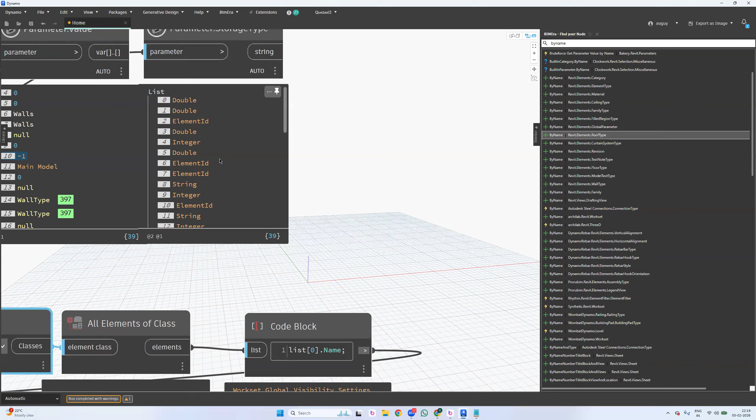So let me see. The 14th one is an element ID, wall type. I'll just check, do I have any wall types? Sir, I have one doubt. If we are using a different type of duct category, how do we find it? Duct category means? For example, GA duct, SS duct or FRP duct types. That we'll explain in the coming session. Don't worry. Okay, fine.

So wall type. Now, what else we have? The 20th one, image. Here all the things are written as wall type, so how can we identify which wall type we want to select? Generally, we have to see the names. Very simple. I have a list of elements, and I'll get the name of it.

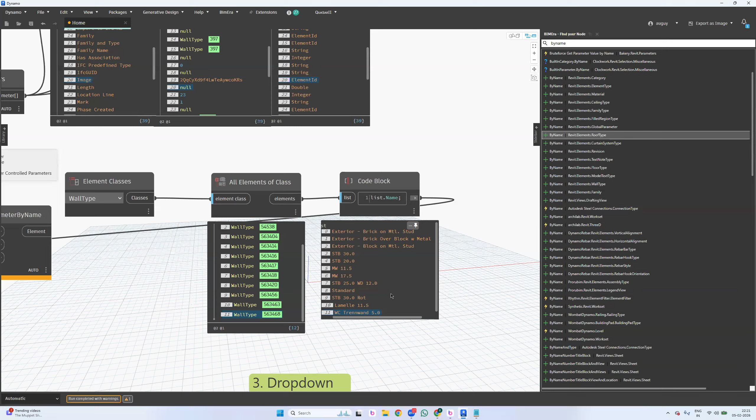So the 0 index element is exterior brick on metal stud, and this one is brick over block. The second one is exterior block on metal stud, STB 30, STB 20. So the 11th one is this. Are you clear? Yes, sir. Okay, good.

The 20th one, image. There are some parameters you can't play with. Why? Because the 20th shows null, and that is an element ID. I'll show you some parameters in the coming sessions, like material. For example, edit type to play with this structure: there is an additional button, and when I click on edit, it opens another pop-up.

If I want to use Dynamo to play with it, I can't. I don't have that set of options because the Revit API is not completely open. Autodesk has kept some restrictions on some of the parameters. So you can't play with all the parameters. One of the parameters is image here, and some others like 24.

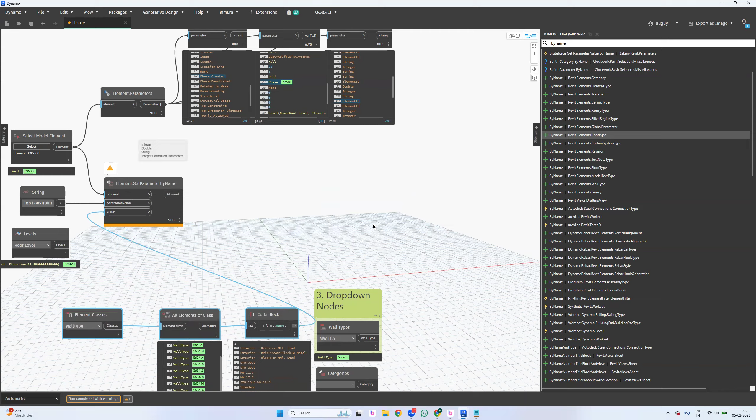What is the 24th? Phase created. How to get the phases? Any idea? Sorry, sir, can you ask one more time? How to get the phases? List, and the 24th we need to. No, what is this actually saying?

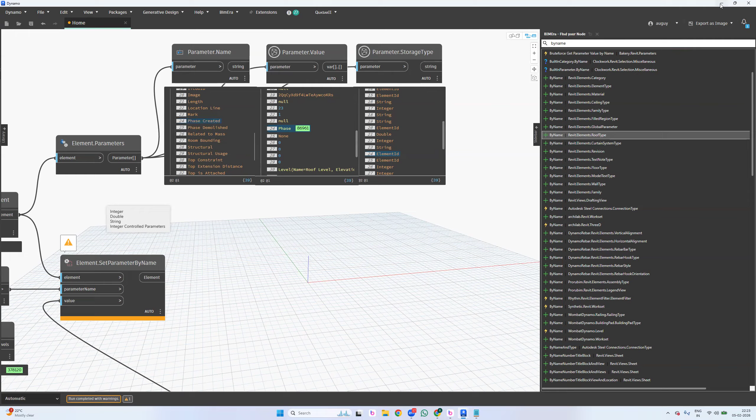For the 24th parameter, I want to change the phase created. When I pick this element, phase created has two options: new construction and existing. It looks like a string, but when you hover the cursor on it, it's a drop-down list. And when I read that data type in Dynamo, it clearly says it is an element ID. So how to set that phase created?

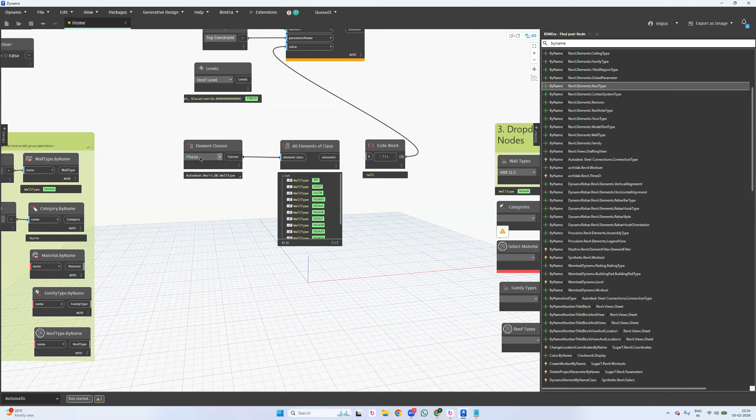Either I will be using Phase.ByName, correct? Do we have anything like Phase.ByName? Maybe we have it somewhere, or else I have to pick the phase. See, we have two phases here. What phases do I have when I connect this? I have two phases.

What happened? What happened, sir? What happened? Come on, ask everyone. I think it's because in the code block we did not give the proper index there. The code ran because it's set to automatic. It's better to do it manual. Correct. Okay, and one more thing.

Actually, I'm trying to change this phase created from new construction to existing. Correct? Existing. Actually, it is expecting only one value at a time, right? So it will take all the elements automatically. We connect not to all the elements, but to the single element only, because we are playing with a single element. But instead of connecting a single object, I've connected both.

Are you guys clear? Now this will confuse, and I'm not scaring you. I'm not really scaring you. Dynamo gets confused sometimes. Generally it's an overlook; I didn't notice because someone disturbed my flow here. Otherwise I would have noticed it quickly.

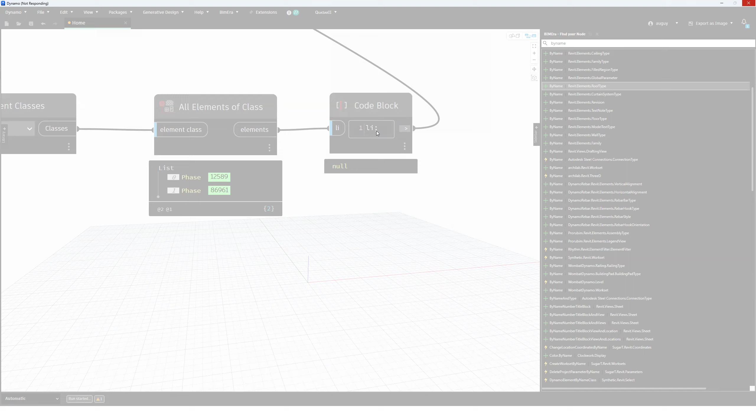Okay, fine. So what we are supposed to do after this is tell clearly what this list of 0 actually is. One is existing and the second one is new construction. Correct? Yeah. I have to connect only one here. But unfortunately this has two elements. It accepted two elements, and it is connected to two elements. Even though it is showing null, it will take two options.

No, it actually started reading. It started reading. Okay. See, I'm escaping multiple times, but still nothing happened. I think my machine doesn't want me to continue the training.

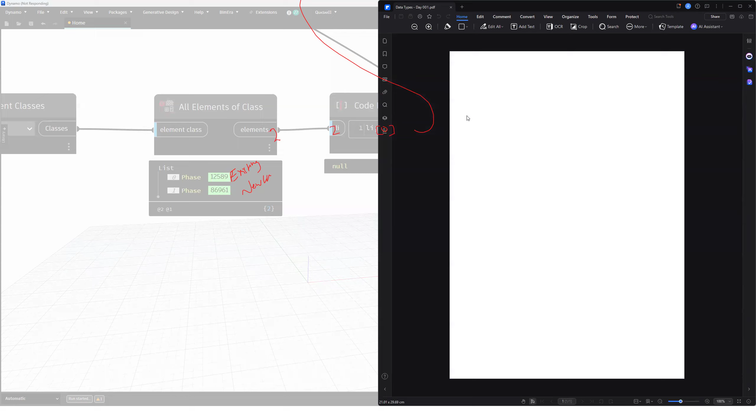Okay, fine. So, guys, today what you have to do is very simple. Let me bring that. I hope everyone downloaded these scripts, right? Download it from the disk first. Data types, not day one. Data types. No, not this.

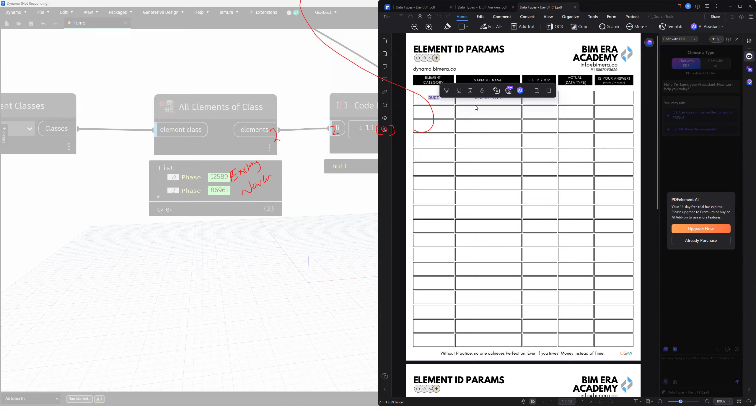Now, here you can start finding this PDF; I've already kept it in the disk first. I hope you already have access to that disk. I've sent it to everyone. I didn't get it, I think. You are on the first list, bro, as per alphabetical order. Just cross check clearly. Okay. I have sent the disk link in the morning itself, so check which parameters have element IDs in them.

Actually, I was supposed to show you something. How to explain? There is no other option. I have to quit, close the program. See, that's the reason I play with manual mode mostly. If I've done something wrong, it will at least give me a break, or else it will stop executing, like DC current and AC current, which is danger, bro.

DC or AC? Come on, electrical guys. DC or AC? DC, sir. DC. Why? Why? No, sir. AC, sir. AC is continuously negative and positive, and DC has negative and positive. Direct power. Correct. DC has a continuous range; DC does not have frequency. Correct? No?

So this is actually like DC. It will not leave us, but manual in the sense it will execute and give me a pause. Is it clear? When you run it again, it will run from here to here and give a pause. Automatic just keeps on flowing, so we can't say when it stops. Guys, clear? At least if this were manual, it would have stopped. Guys, are you clear with this concept?

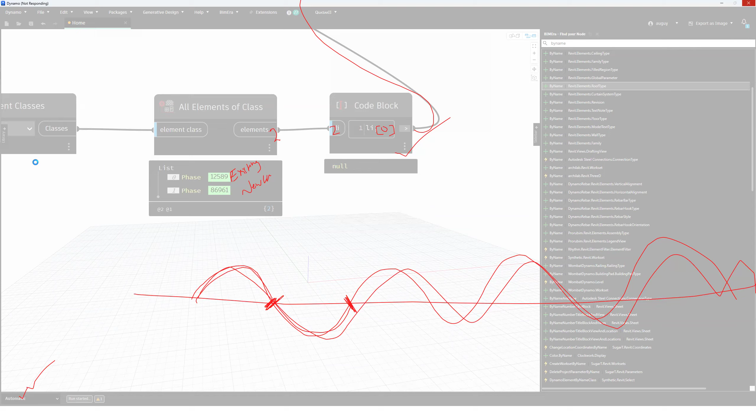Manual and automatic? Yes. That's why you told us in your first session, I think. Actually, we are going to discuss manual and automatic in the fourth day concept, I mean on Monday. From Monday onwards, Monday and Tuesday, we have 2 days. How to do research and development on your own will be in the Monday session, and everything inside Dynamo will be explained in the Tuesday session. Okay, so

try to attend as much as possible. Every concept that I teach is very important, because if you go through the recorded videos, they will not give you that impact. If you ask me, I have a bunch of resources with me. If I want to do some research, I'll start looking for it. Do you have any tutors? At the same time, I'll check if it is cost effective. First, I'll get all the resources.

But still, that is not sufficient for me. I'm still looking for more. I already have sufficient content, more than enough, but still I feel it isn't enough. I need more, need more. I'll buy there, I'll buy here, I'll buy everywhere. But still I keep searching for new content.

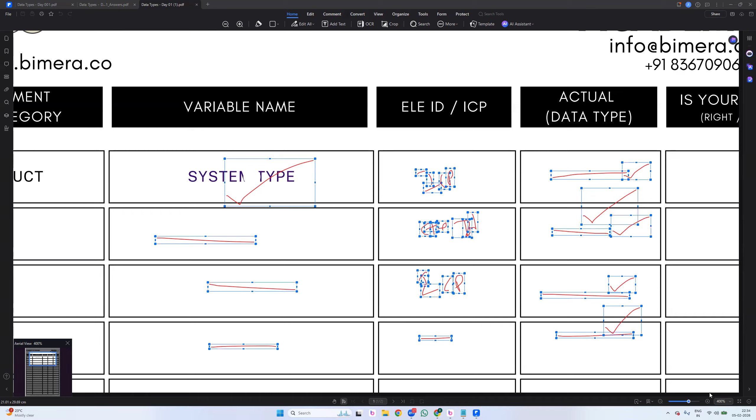If you're getting a wrong answer, that stores in your brain very strongly. Understand? So if everything is correct, you will definitely forget in no time, because you build some overconfidence.

Clear? So play with all the parameters, but don't play with any other disciplines, just focus first on only your discipline elements. Clear everyone? Clear. Yes.